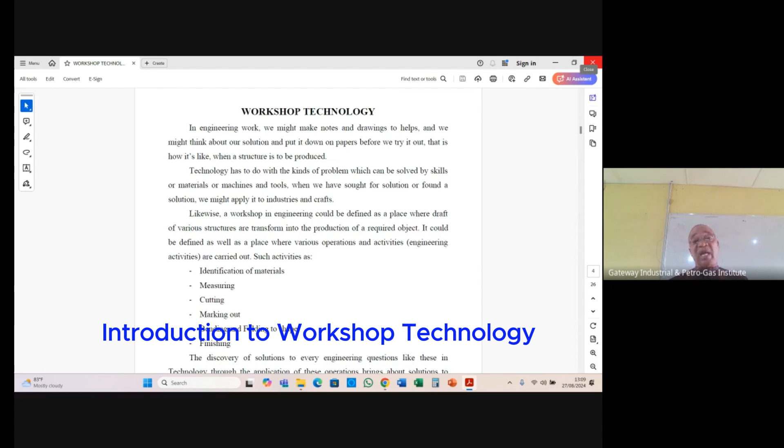That tree you are working under is a workshop for you. You may have a container, put it somewhere, and you begin to put one or two things together. When you are doing that, people will see you and know what you are doing. People will come around to tell you, Baba, what are you doing here? Okay, I'm into welding and fabrication. So people will begin to come with that container where you are.

That container where you put your hand tools is a workshop. You might have a very big and large workshop. Take for instance in an industry or in a construction work place where you have a very large size of building that you call a workshop. Wherever you see a machine and tools and you are working with, that place is a workshop.

Are you with me? And what do you understand by the word technology? Technology is the ability in you, the ability in you for you to make use of your knowledge, the acquired skill, and the available materials around you.

Technology will make you make use of the draft of a particular object, when you apply the knowledge that you have gained in the school, together with the skill, the ability to work with your hands, and the available materials around you.

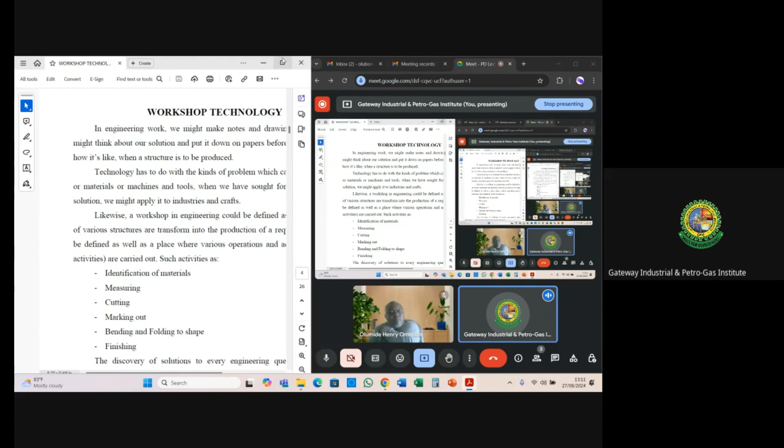So that is workshop in a nutshell. That is what workshop implies, and technology. So the two are working together. When you now talk about workshop and technology, you can define them as a place where all engineering activities are taking place, including fabrication, pipe and pipe fitting, block laying, and so on and so forth.

And the technology there is the ability in you to make use of your knowledge, your skill, and the available materials. When you talk in terms of available materials, if you are in plumbing, you'll be very much conversant with the use of a plastic pipe and so on. But if you are in welding and fabrication, definitely you must be using metal material.

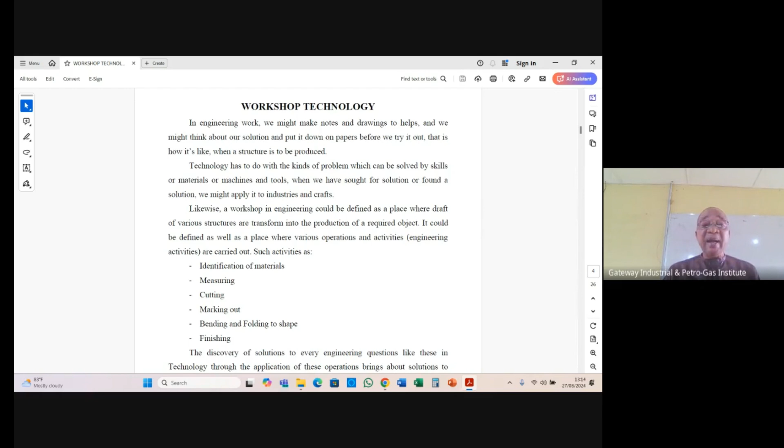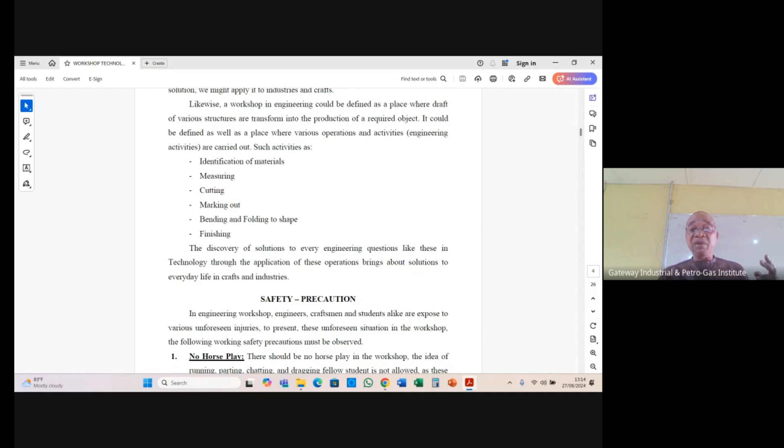We have two types of metal, which is the classification of metal. Are you with me? Mr. Olumide? Yes, I'm with you. Thank you. Metals are classified into two major classifications.

The first class is the ferrous metal, while the other one is the non-ferrous metal. What do you understand by ferrous metals? These are metals that can be attracted to a magnet. That is the simple language that I can make use of to enable you to understand and differentiate between ferrous metal and non-ferrous metal. Are you with me? Because ferrous metal contains iron, while non-ferrous metal does not contain iron. An example of ferrous metals are mild steel.

We have cast iron, high carbon steel, low carbon steel, and many types of steels. Any steel or metal material that can be attracted to a magnet is a ferrous metal. We have a lot of tests you can carry out on a particular metal to determine whether it is ferrous or non-ferrous. You can carry out structural tests, magnetic tests, sound tests, and so on, which are contained in your coursework. That is about metal.

What about plastic? Plastic may be synthetic or natural. The natural one is what you get from the tree, the rubber tree, in form of latex. We have two major types of plastics as well.

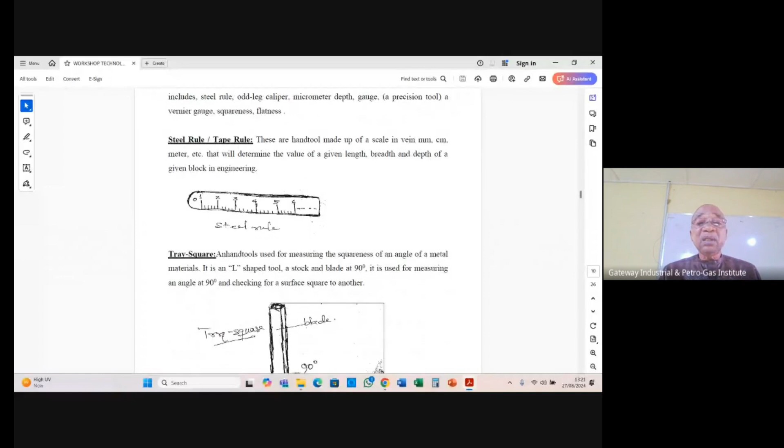The next one is the tri-square. Tri-square. You will see it in your coursework, the tri-square.

I will need to refer you back, because I discussed with you that metal material has to undergo a smelting process before you can get the actual metal out of the hematite and magnetite, which is the raw material that you get from the innermost part of the ground. I'm still coming back to measuring tools, but I just want to introduce you to how a metal is being produced. Are you with me?

When you've gotten your hematite and magnetite, you may get hematite in Osun State, and you may have magnetite in Lokoja. Are you trying to understand what I'm saying?

So if you combine these together, or get one out of it, you charge it into a furnace called a cupola. When you charge it into it, there are a lot of ingredients that you have to put into it before you can get your pig iron.

So kindly bear in mind the processing of smelting a metal material before you can get the various types of metal material that we have.

Now, coming back to the measuring tools, we've talked about the scale rule, or the steel rule and tape. We discussed that it is used for linear measurement. There are two major ways by which you can measure distance: the imperial way and the SI unit way. The imperial way is where you make use of inches, feet, yards, and miles. But the SI unit, the international unit, makes use of the centimeter, millimeter, meter, and kilometer.

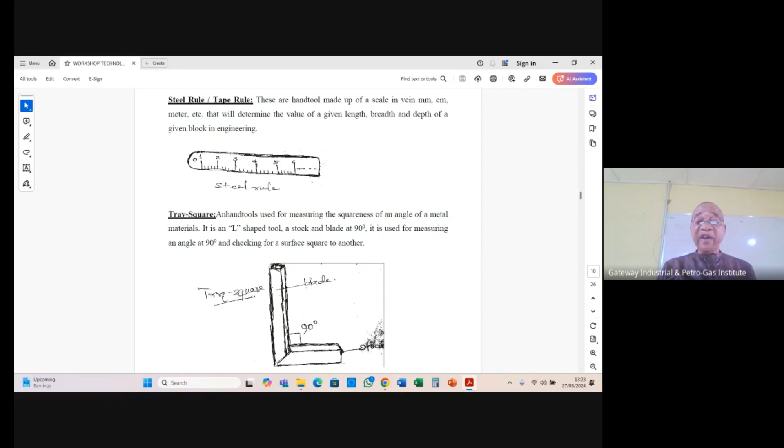If you look at the tri-square very well, it is in an L shape. The L shape is fastened to the stock with a screw. In most cases, by riveting, they rivet the blade into the stock.

Why do you call it tri-square? It is called tri-square because the blade and the stock are at 90 degrees to each other. It is perpendicular. Do you understand? The blade is perpendicular to the stock. It maintains a 90 degree angle with each other. Hence, you say it is square.

Tri there implies that you use this material, the tri-square, for finding the squareness of your work, the squareness of your fabrication. When you are fabricating a metal, or you want to cut a metal or a plastic, you can measure it with the tri-square, because most of these tri-squares we have these days have a graduation on them as well, like that of your scale rule or tape rule.

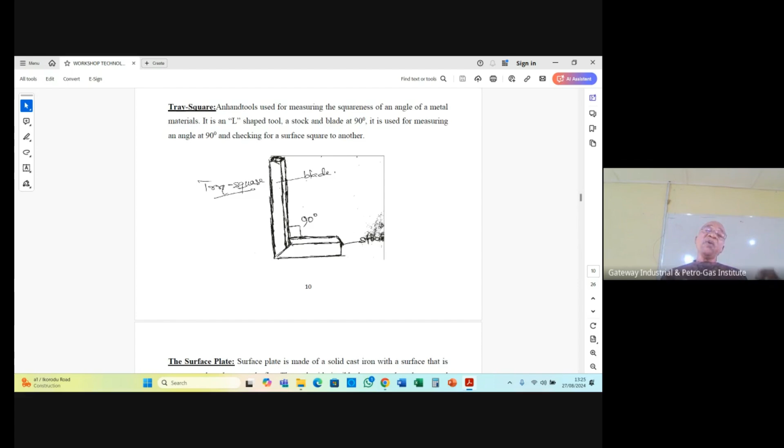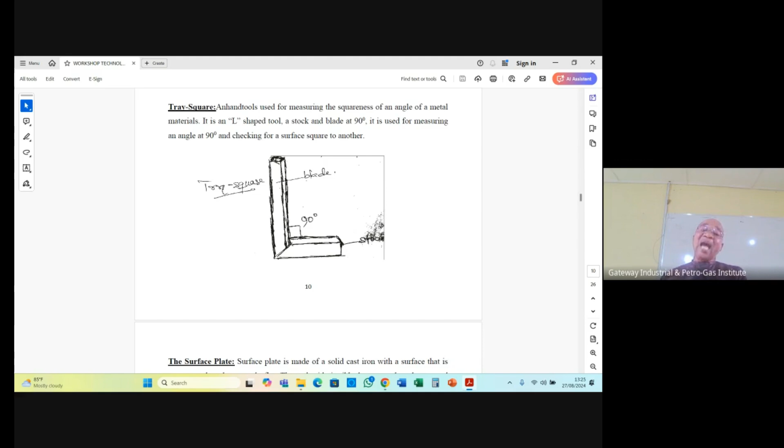So you use the try-square for finding the squareness of an angle. You can try it as many times as possible before you get the squareness of that particular material. Hence the name try-square: you try it many times before you can get the squareness of the metal.

Next is the surface plate. What do you understand by surface plate? This is a rigid metal material, very solid and strong. The surface is flat. It has been polished to zero limit, so the surface is very, very smooth.

How do you make use of this surface plate? The surface plate you see there is solid cast iron. The surface is very, very flat, and you use it for finding the flatness of a particular metal. When you are constructing, you need to measure the flatness of a particular metal, most especially those working on a lathe machine or any other type of machine that requires knowing the flatness of a metal. So the surface plate is meant for finding the flatness of a given metal.

Are you with me? You can also use it together with other materials to find the flatness of such a metal material. It comprises three major parts: the flat surface, the handle, and the rib.

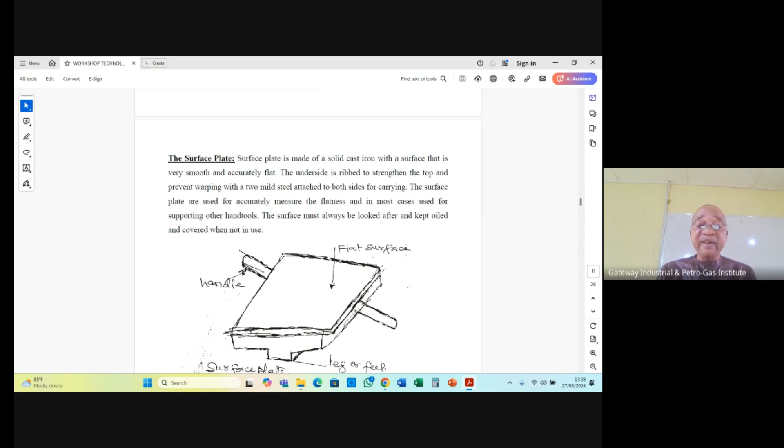So how do you make use of a surface plate? You need to smear oil on the surface of the surface plate. Then you take your metal or plastic material and rub it on the surface of the plate. If the oil covers the whole face of your metal material, it means that metal is extremely flat. But if it's not found around the surface, it means the metal is not flat enough, and you will take it and grind it or file it to get the surface very flat.

When you smear oil on the surface of the plate, you place your metal material on it, then rub it on the surface. If the oil cannot cover the whole surface of your metal, it means the metal is not flat enough. Then you have to regrind, or use a file to adjust where necessary, and take it back to the plate again to rub it. If the oil now covers the whole surface of your material, it implies that the metal or plastic is as flat as anything you can think of.

Next is the spirit level. The spirit level is a rectangular solid bar. It has a liquid in front and by the side of the bar. It is used for measuring or checking surfaces on horizontal and vertical planes. That is the spirit level for you.

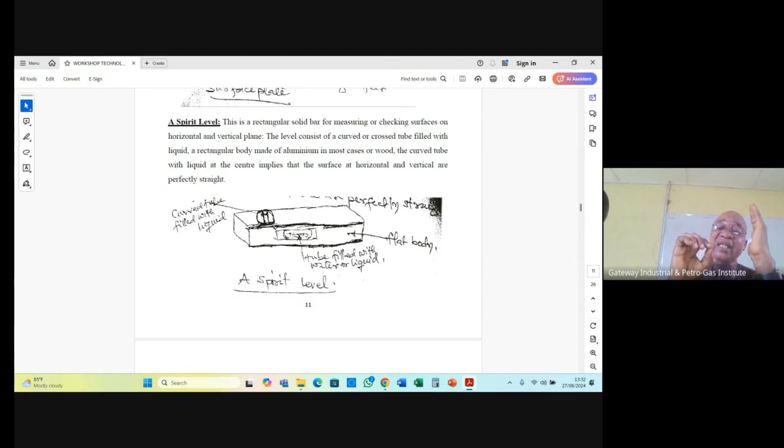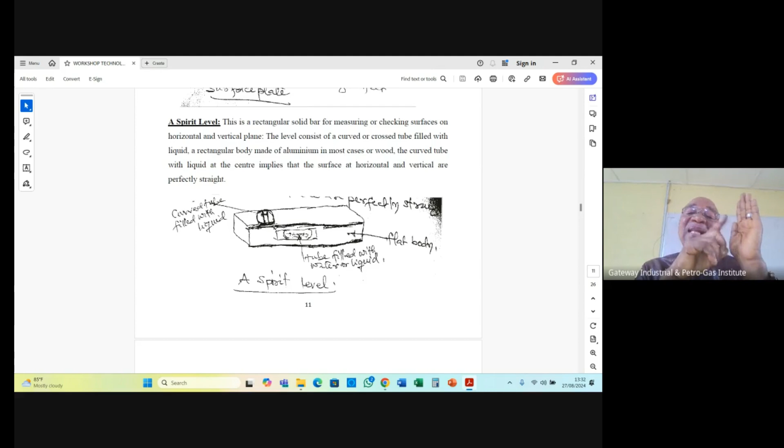When the liquid is at the center of that tube, it will show you clearly. So both on the surface of the flat part and by the side of the solid bar, you will see that the tube and the liquid inside is at the center on both sides. That tells you that your material is perfectly straight on a horizontal or vertical plane.

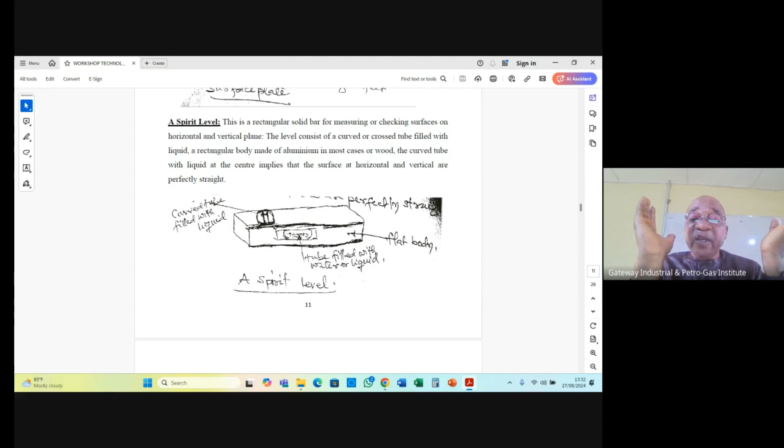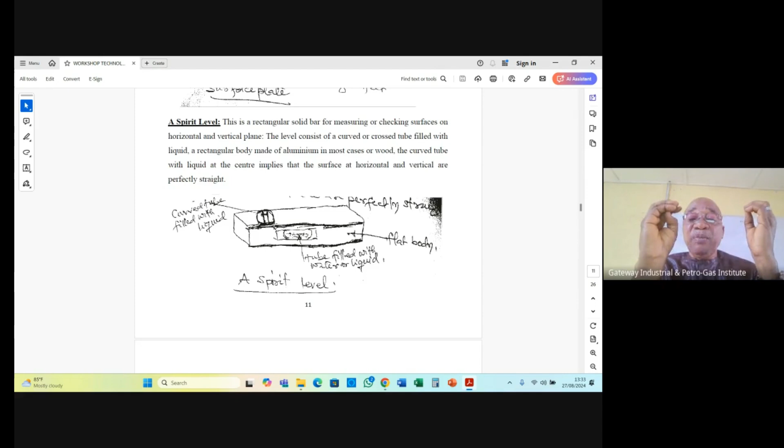So it comprises many parts. You will see the curved tube filled with liquid on the flat surface. By the side, you will see a tube filled with either water or another liquid — it might be spirit inside that tube. You will see the body. So that is a spirit level for you.

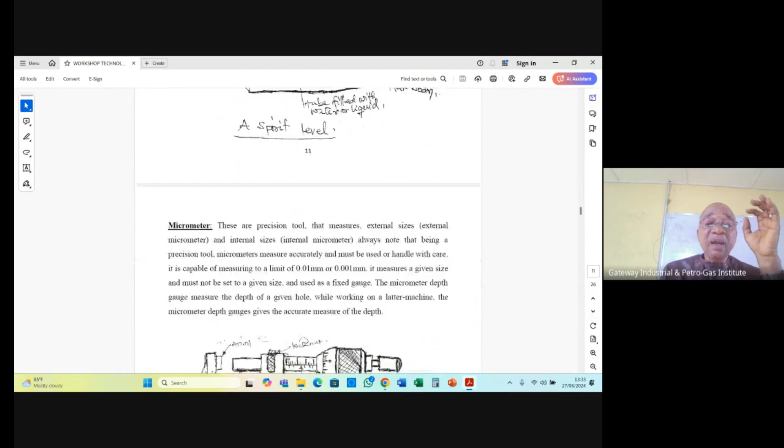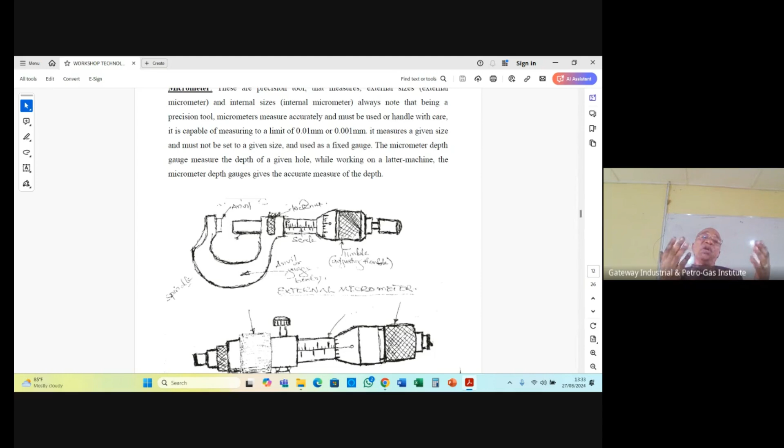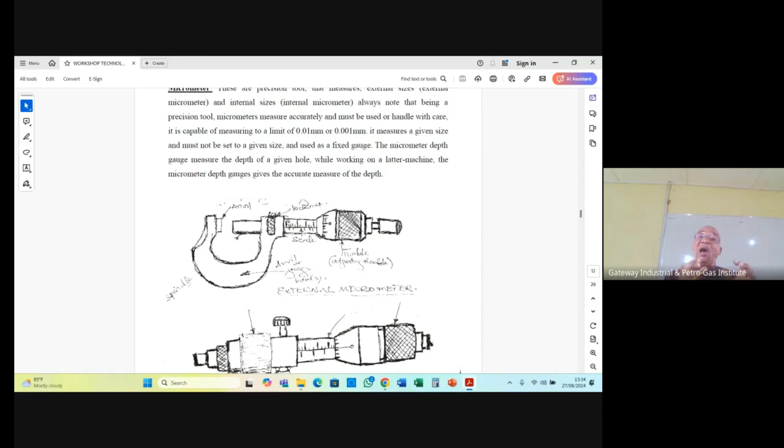Micrometer. Micrometer is a precision tool. Precision in the sense that it can measure to the barest unit, 0.001 or 0.01 limit. Can you imagine how minute that measurement is? It is not possible for you to use your steel rule or tape rule to measure that, most especially if it were a round object — though that doesn't mean you can only measure round objects. You can measure anything using your micrometer.

When you are measuring, it is a precision tool, in the sense that it can measure to the barest unit of measurement, from 0.01 to 0.001. That is the reason why we call it a precision tool. We have three types of micrometer.

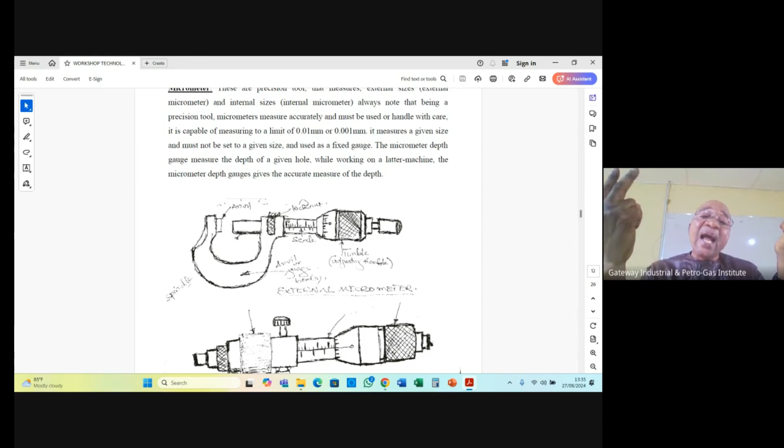We have three types of micrometer: the internal micrometer, the external micrometer, and the depth gauge micrometer. Those are the three types of micrometer that we have.

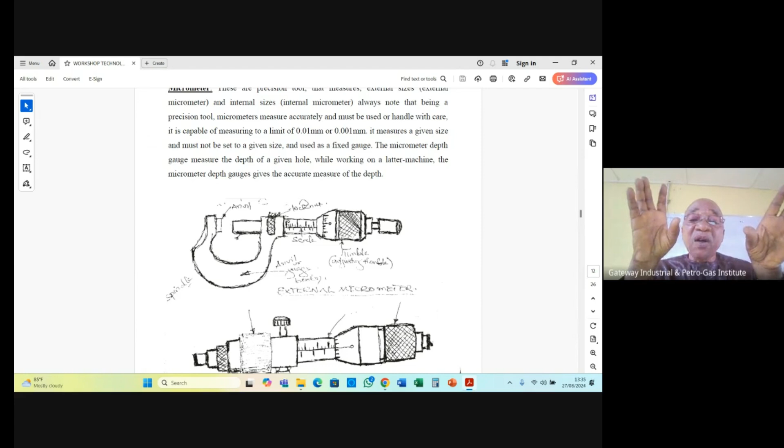And it comprises of many parts. You will see the anvil, the spindle, the frame, the lock nuts, the scale, the thimble, and the ratchet. You will see it there.

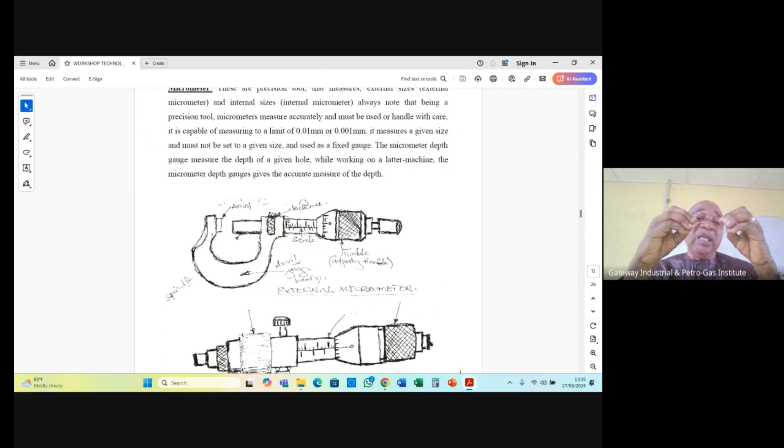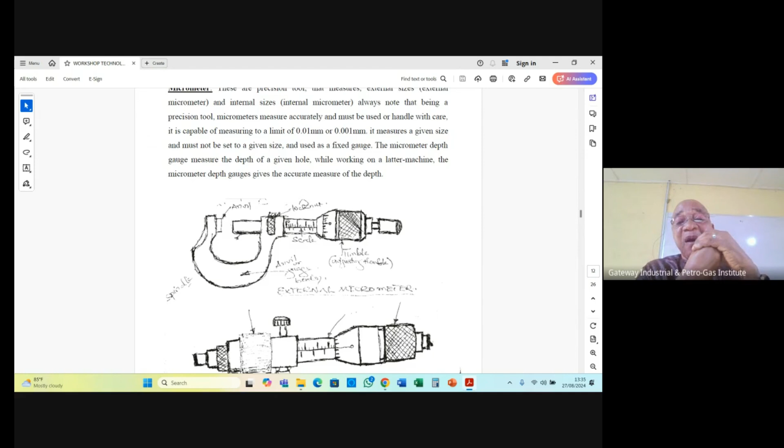All these are meant for adjusting. In between the moving anvil and the fixed anvil, you will place your pipe that you want to measure to know the diameter. You put it and turn the thimble, allowing the spindle, the moving spindle, to hold the material in between the fixed anvil and the moving anvil.

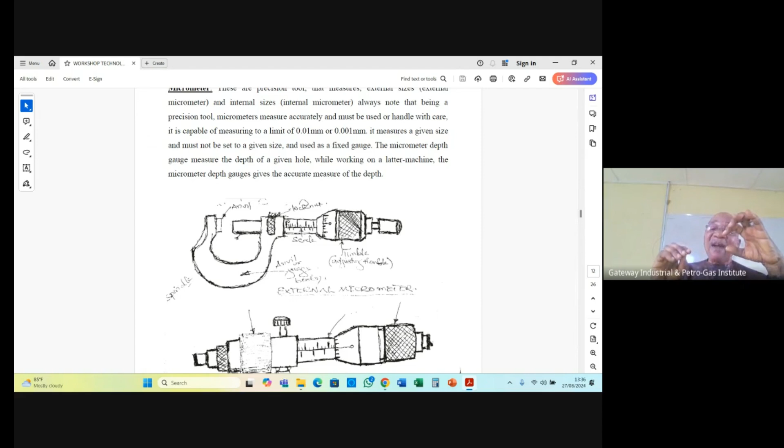Then use the ratchet to fine-tune the tightening process. When you use the ratchet, it will enable you to get the precise size of that particular pipe. So you understand. And when you look at the other one that we have there, that one is used for measuring internal measurement.

The first one is used for measuring external measurement, while the other is used for internal measurement. So we have the other one, which is the depth gauge. This will enable you to get the actual size, the actual measurement of a particular depth of a hole in your material.

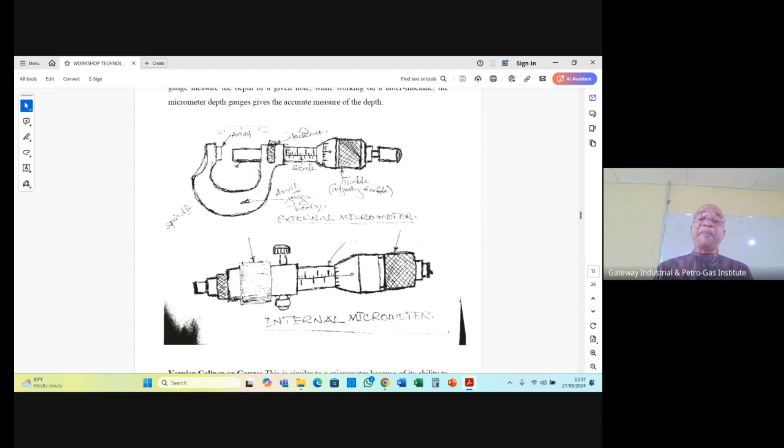Like say you want to cut a size of plumbing material, an example of pipe. You know the measurement, maybe it is half inch or 1.5 inch or 1.5 meter or 1.5 millimeter of pipe that you want to cut. You cannot just pick a pipe and say you want to cut it. You must measure and be sure that what you are measuring, the pipe you are having, is the actual size that you needed for your work.

So you can make use of the external micrometer to find out the diameter of such a pipe, and you can use the depth gauge to find out the depth of that particular pipe that you want to use. So the internal micrometer, the external micrometer, and the depth gauge, they are precision tools.

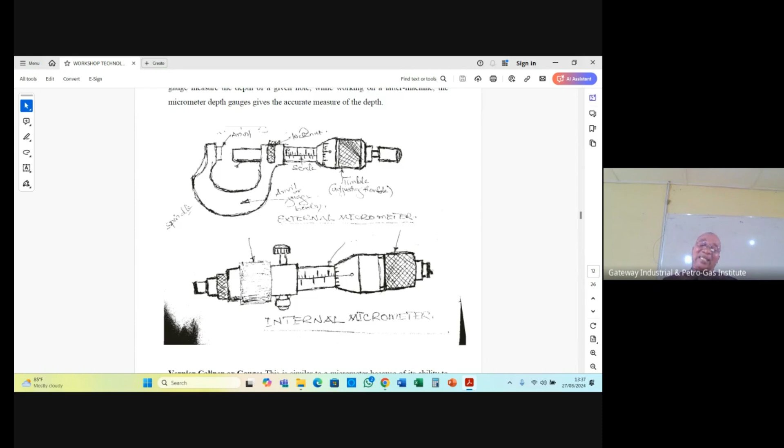Precision in the sense that it will give you the precise measurement to the limit of about 0.001 to 0.01. Are you getting what I'm trying to put across? Thank you. So that is that about micrometer.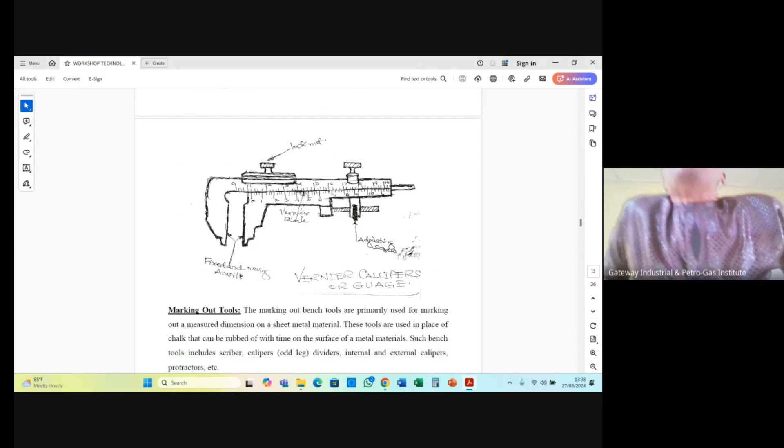Then we now talk about the vernier gauge. The vernier gauge is similar to the micrometer, in the sense that it is also a precision hand tool. It can also measure to the limit of 0.001 to 0.01, so it can give you the precise measurement of the material you want to use.

A vernier gauge or vernier caliper is similar to a micrometer, but most vernier calipers put together the internal, the external, and the depth gauge in one. So the vernier caliper might be 3 in 1, whereas the micrometer is separated from one another.

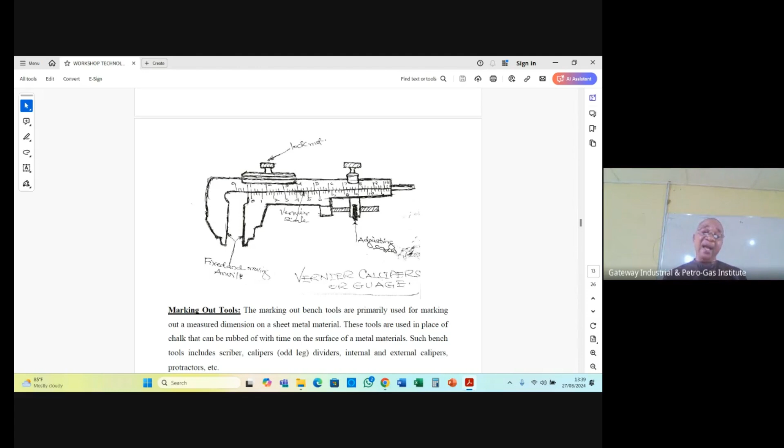We have the internal micrometer on its own, external micrometer on its own, and the depth gauge on its own. But in the vernier caliper, this is where the difference comes in. It is different from the normal micrometer because with a vernier gauge or caliper, you can measure the internal measurement, the external measurement, and the depth gauge of a particular structure. That makes the difference. Understand?

So all these hand tools put together, when you are in the workshop, you must make sure that you use them and use them perfectly well. And after use, you must clean them, probably with soap water, turpentine, petrol, or kerosene for further use. Am I saying something? Yes. Thank you.

So in terms of hand tools, we are stopping here today, but I want to introduce to you a measure, because by the time you get into the workshop here, there are precautions that you need to observe.

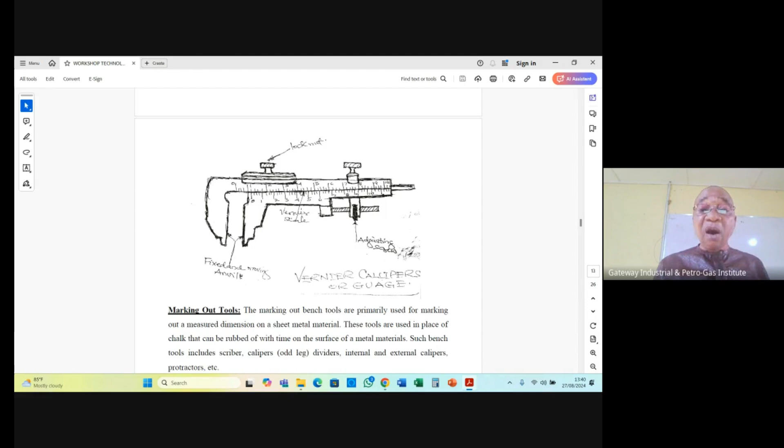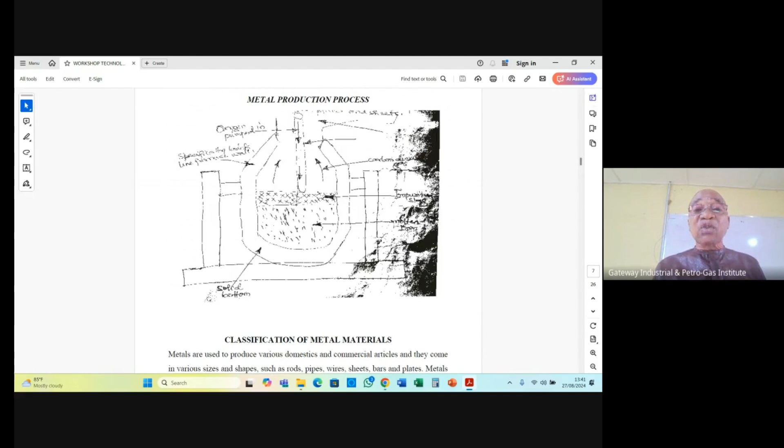When you look at your coursework, you will see all these precautions there. All the precautions have to be taken care of when you are in the workshop. If you look at your screen, you will see it there right now. Is that not so? Yes. Can you see it?

These are the precautions for you that you must adhere to whenever you are in the workshop. Please put them into use by the time you are here and in the workshop, because all these are precautionary measures that will prevent an unforeseen circumstance when you are in the workshop.

Unforeseen injury may cause a lot of things. If care is not taken and you fail to adhere to all these precautions, one will end up in a situation I don't pray for when you are here in the school.

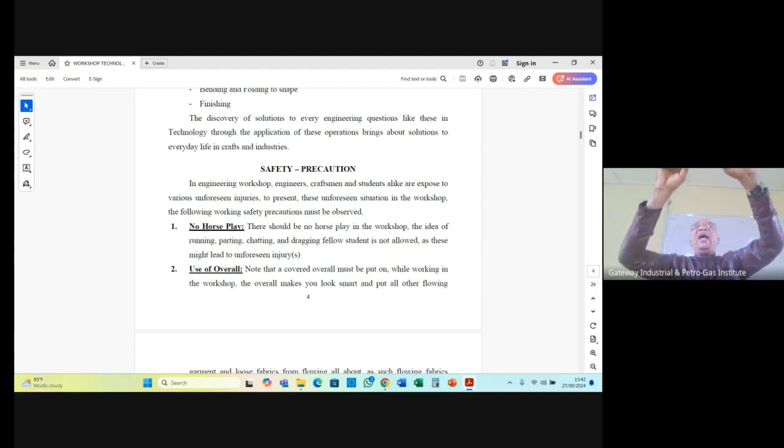One, no horseplay. No horseplay. What do you understand by horseplay? I believe you must have seen a horse. When the horse is playing, he will raise the two front legs and he will be jumping here and there. In the workshop, you are not supposed to engage in horseplay.

How do you carry out horseplay when you are in the workshop? You have a friend, you have been chatting together, you have been staying together, and you are in the workshop. You pat him, and when you pat him, you run away, and he would like to run after you. Such is not allowed in the workshop.

You must not engage in horseplay, because in the workshop we have a lot of revolving machines, like drilling machine, cutting machine, milling machine, lathe machine, and in most cases we deal with hot material. Most especially those in WFT, welding and fabrication department, we deal with hot material. But if you are running around the workshop and you fall into a revolving machine, you know what it means. God forbid.

Two, use of overall. Your overall must be put on when you are going to the workshop. This overall will enable you to put at bay all other fabrics on you, so they will not be flying here and there. The moment you put on your overall, you are good to go. You will look very smart in the workshop, so you can carry out whatever operation you want to do when you are in the workshop.

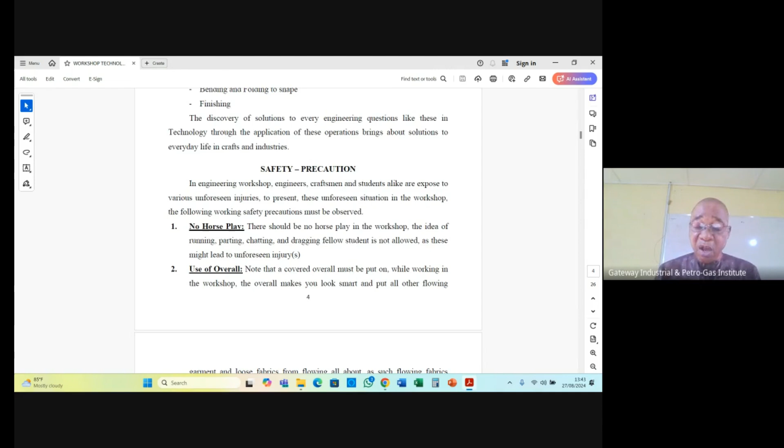Three, use of covered boot. You must always put your covered boot on. When you are in the workshop, nobody will allow you to come with slippers, sandals, canvas, or whatever. It's not allowed in the workshop. You must always put on your hard covered boot, as this will prevent any unforeseen circumstance, probably stepping on a very sharp object, or a very hot object.

So this will prevent you from having injury on your legs.

Four, no use of tie, chain, and bangles. It is against the ethics of engineering students to make use of a tie, or a necklace, otherwise known as chain. You don't use it. You don't use metal bangles. You don't use metal wristwatches. All these are forbidden when you are in the workshop, because if you allow this tie to be entangled into a moving, revolving machine, you know what it means.

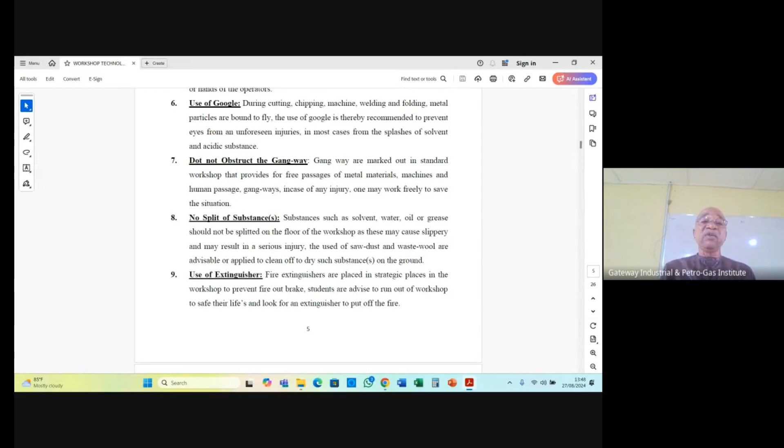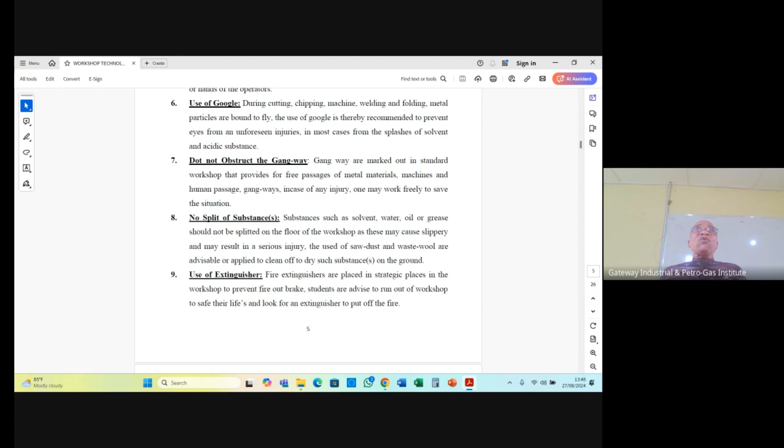Number 7: do not obstruct the gangway. What do you understand by gangway? In a standard workshop, where you have a very big workshop with many machines like milling machines and cutting machines, you will see demarcated passages in the workshop.

That area is demarcated to allow you to move freely in the workshop, so that it brings about free passages. Assuming there is an accident, and along the passages you put a very big metal material that will prevent people from moving freely, and there is an accident, and you want to carry such a person out of the workshop, in the process there is a blockage along the passages. What do you think will happen before you can remove that obstacle?

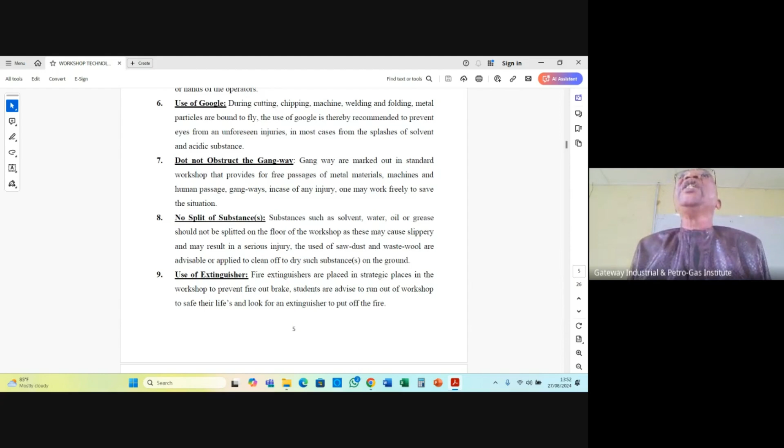Next, substances such as grease, oil, water, or solvent on the floor of the workshop. Make sure you clean any place where you see a pool of water, oil splattered on the floor, or grease somewhere on the ground. You must keep the workshop clean, because if you step on any of these substances and slip, you may not know where you are going to hit your head, or you may hit your head onto a revolving machine, and you know what that means. So you need to be highly observant when you are in the workshop. There is a provision for cotton wool, waste wool, and other material that you can use to clean the workshop.

If you see any of these substances on the floor of your workshop, please make sure you clean the place. Take for instance, you are a welder using electricity, and there is a peeled cable you are using lying near water. The moment you touch the water, whether you are holding the wire or not, the moment you touch the water, it will shock you. It may throw you out of balance.

So please, if you see any substance or substances on the floor of your workshop, make sure it is cleaned. Next is the use of extinguisher.

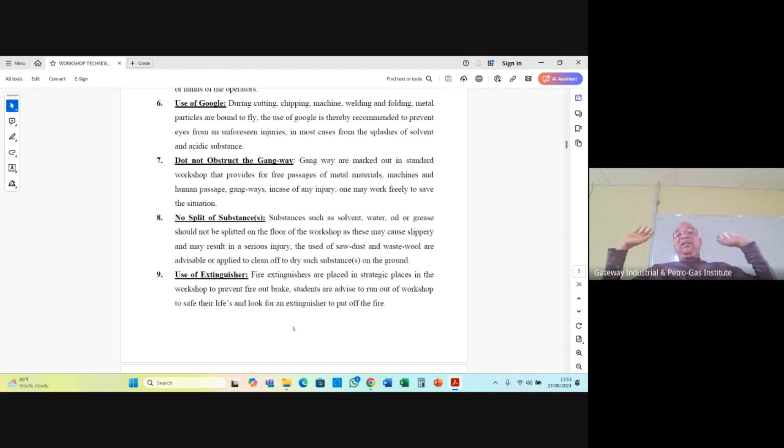Anything can happen in the workshop because you are operating machines, working with electricity, and working with very many gadgets. In case of any fire outbreak, I repeat, in case of any fire outbreak, please run out of the workshop first. Anytime, anywhere, even if it is not in the workshop, wherever you are and there is a fire outbreak, please run for your dear life.

So in a workshop, if there is a fire outbreak, what you need to do is first move out of the workshop. It is you being safe that allows you to come round and save others caught in the web of the fire, because when there is a fire, the smoke will engulf the entire workshop. So whenever you see fire in a workshop, please run out first. Then it is you who will think about what you can do to help others caught in the fire.

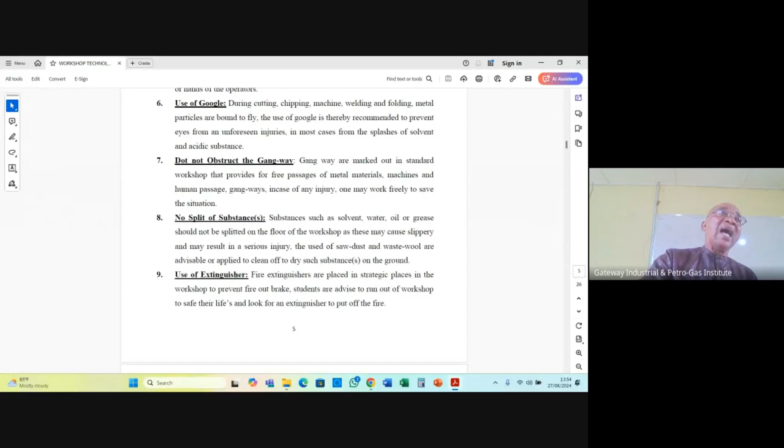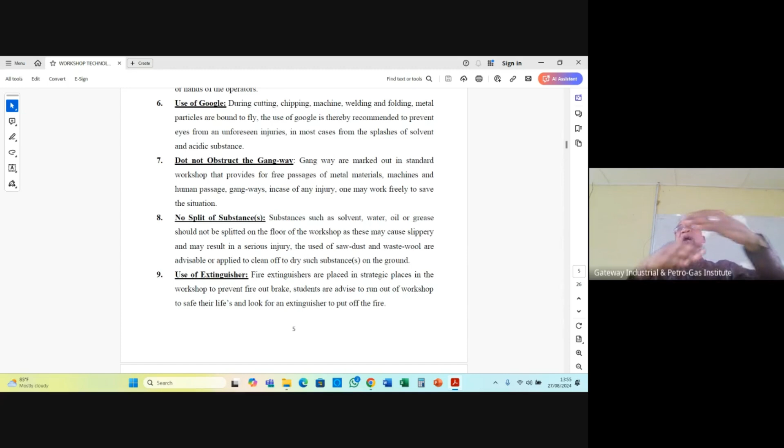You now think of a fire extinguisher, because in a standard workshop there must be a fire extinguisher placed in strategic places outside or inside the workshop. So if you are in the workshop and there is fire, you first run out, then look for a fire extinguisher outside. Then you operate the fire extinguisher to help others and quench the fire. That is all about the safety precautions when you are in the workshop.